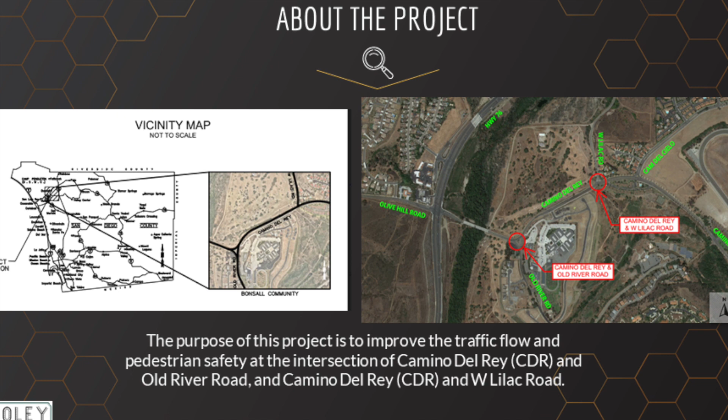Looking at the vicinity map, we can see that Bonsall's neighbors are Fallbrook, Oceanside, Valley Center, and Vista. Bonsall has a population of approximately 12,500 people. The community values its rural identity and preservation of open land.

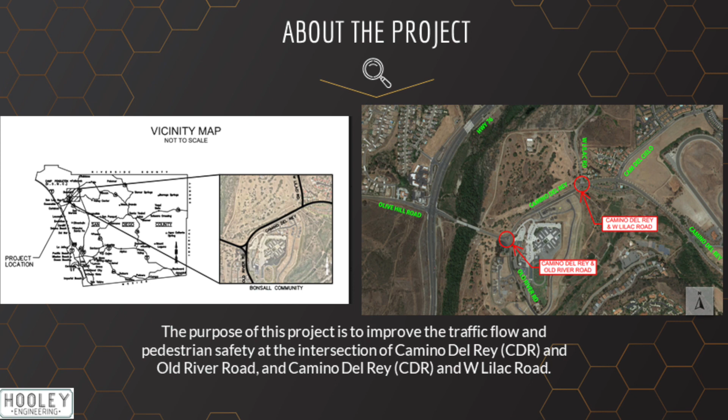The purpose of this project is to improve the traffic flow and pedestrian safety at the intersection of Camino del Rey and Old River Road and Camino del Rey and West Lilac Road, as shown in the figure to the right. The next few slides will go more into depth about the existing conditions at both intersections.

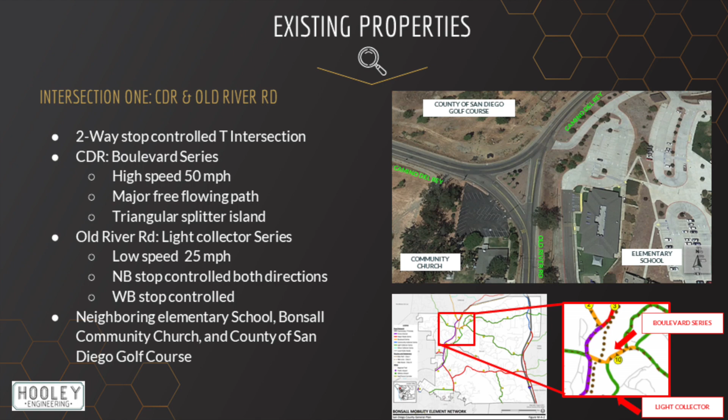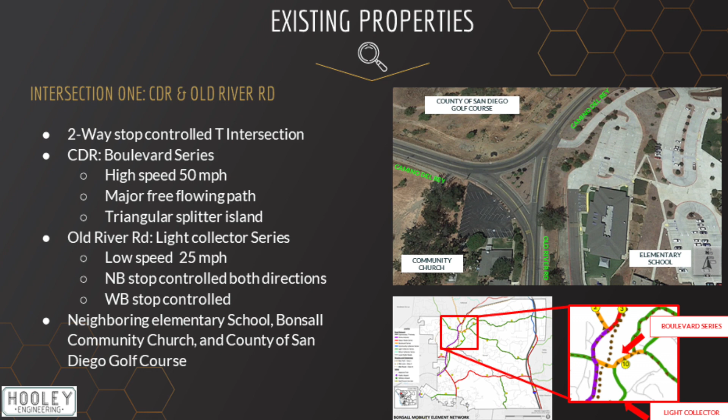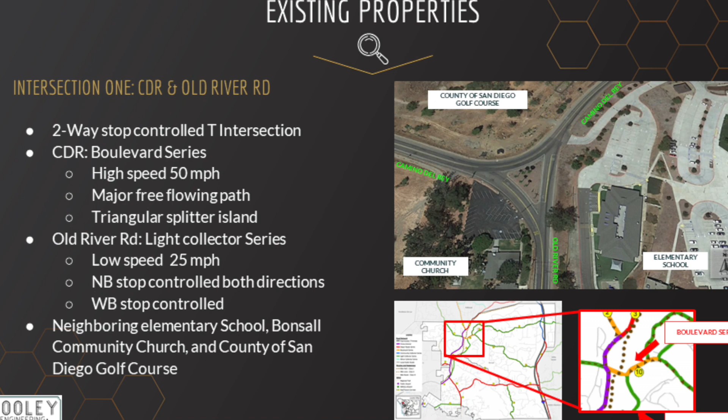At the intersection of Camino del Rey and Old River Road is an existing 2-way stop control T intersection. Camino del Rey is currently classified as a boulevard series and is a major free-flowing path with a speed limit of 50 miles per hour. Old River Road is currently classified as a light collector series with a speed limit of 25 miles per hour. It connects to the residential areas down south of the road.

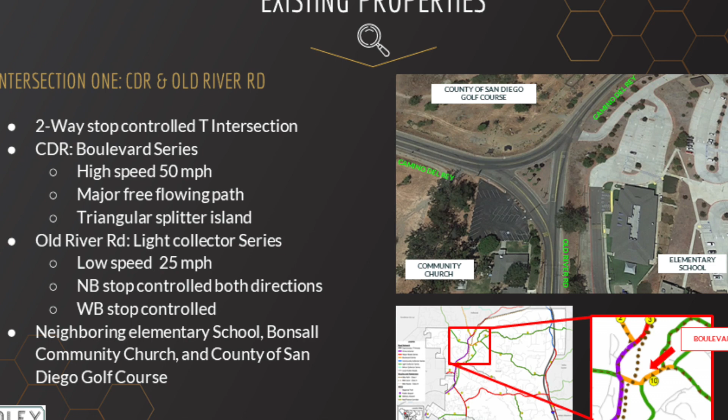This intersection is neighbored by County of San Diego's golf course to the north, Bonsall Community Church to the west, and Bonsall Elementary School to the east. The high speed limit on Camino del Rey makes it very dangerous for the neighboring community church and elementary school.

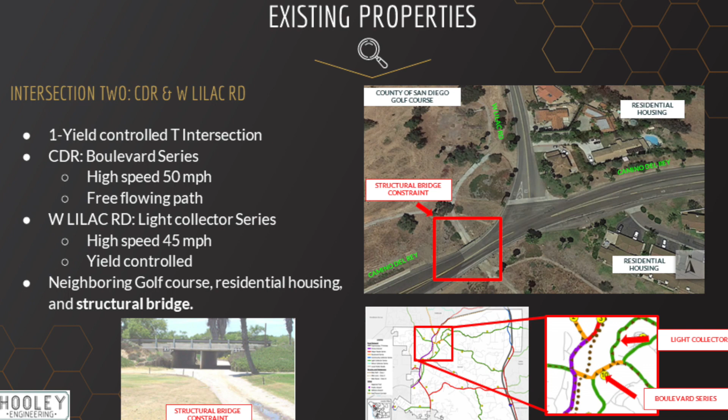At the intersection of Camino del Rey and West Lilac Road is an existing 1-way yield control T intersection. Camino del Rey has the same characteristics mentioned before, and West Lilac Road is classified as a light collector series, with a speed limit of 45 miles per hour. It connects to the residential areas up north of the road. This intersection is neighbored by the County of San Diego golf course and the residential areas.

There is a structural bridge located as shown in the picture. Hooley Engineering has made an executive decision to keep the bridge as it is, avoiding higher costs to the project.

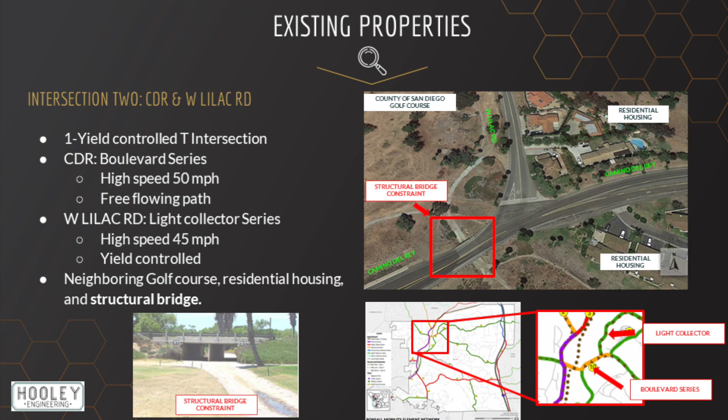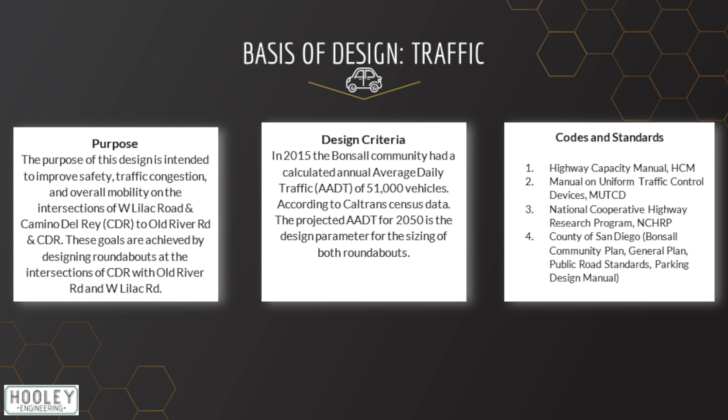In the process of our proposal, our most important focus was our traffic analysis. We had to consider many factors in our design and utilized various standards to approach this project. The primary purpose of our recommendation, the roundabouts on Camino del Rey at the intersections of Old River Road and West Lilac Road, is to provide safe routes for vehicles and pedestrians.

Our design criteria took into consideration the projected annual average daily traffic in 2050. The 2016 HCM and NCHRP were utilized in calculating the level of services and the basis of design, while the MUTCD and the County of San Diego documents also facilitated design standards.

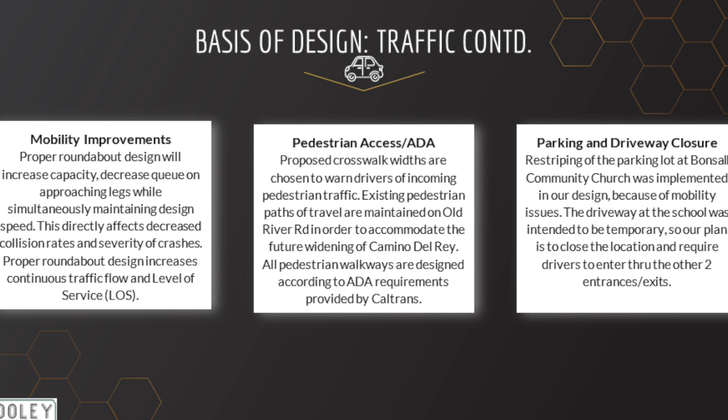As a result of our design, we were able to provide mobility improvements, pedestrian access, and appropriate consideration for outside parameters. The roundabouts would be able to provide an increase in overall safety through its reduction of speeds. The existing pedestrian paths will be maintained to accommodate for the future widening of Camino del Rey.

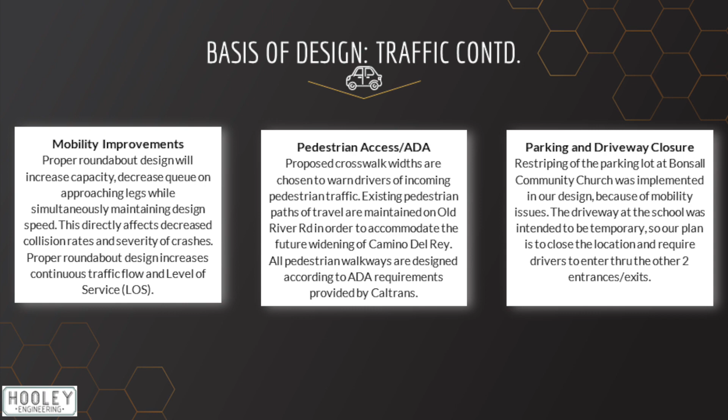For the roundabout to be most effective, Hooley Engineering proposed the restriping of the adjacent Bonsall Community Church parking lot on Old River Road. The elementary school driveway proved to be the leading cause for queuing during peak hours, and as such, it is recommended to be closed to reduce congestion.

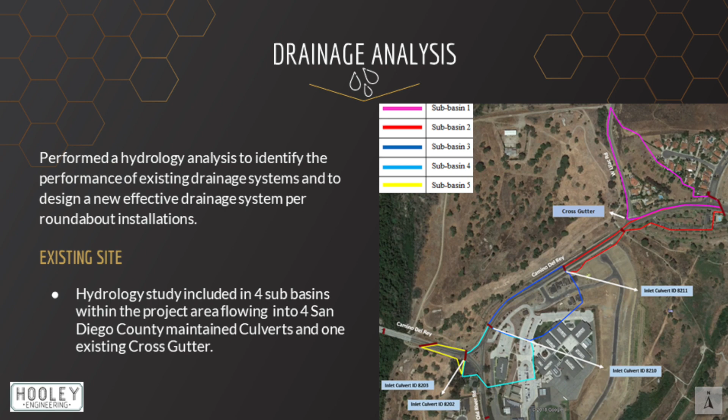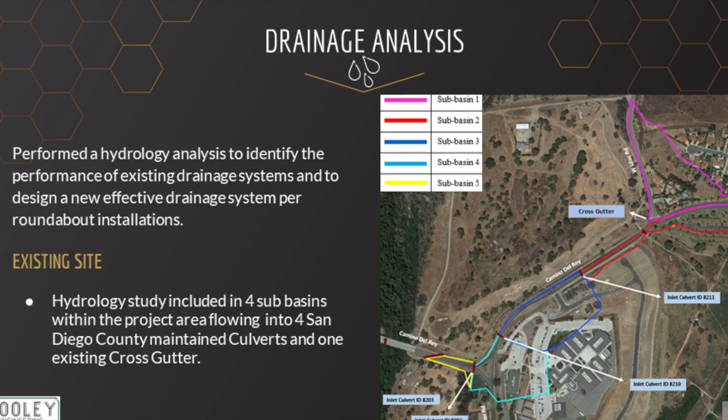A hydrology analysis of natural runoff was performed to identify the performance of existing drainage systems within this project area, as well as to design a new effective drainage system for our proposed street improvements. The hydrology study covers 4 sub-basins within the project area that flow into 4 culverts maintained by the County of San Diego and 1 existing cross-gutter.

This next slide shows each sub-basin's existing peak runoff rate at 50 and 100-year return. Please note that the rational method was used to calculate this table.

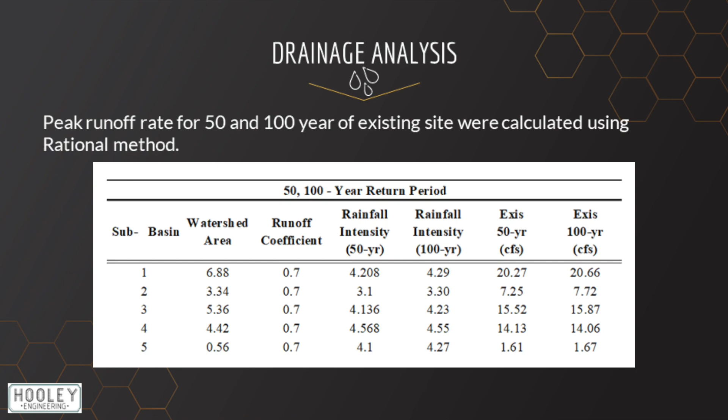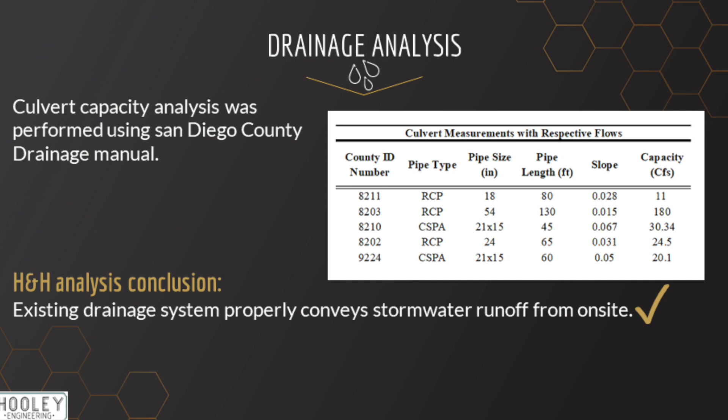The latest inspection sheets containing pipe characteristics were gathered from the County of San Diego, and culvert capacity analysis was performed using the San Diego County Drainage Manual. According to the hydrology and hydraulic analysis, existing drainage systems properly conveyed stormwater runoff from on-site.

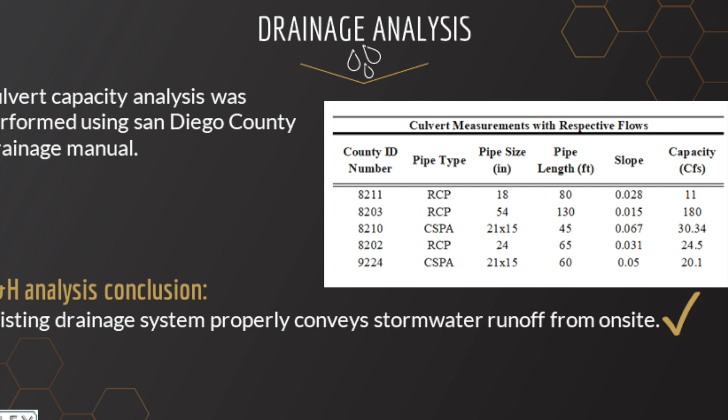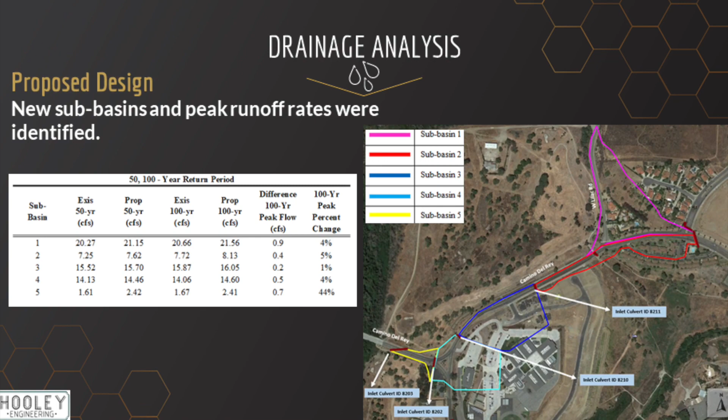After finalizing the design and the road right-of-way boundaries, the new sub-basins and the peak runoff rates were identified. The result of calculation concluded minor impacts on natural runoff.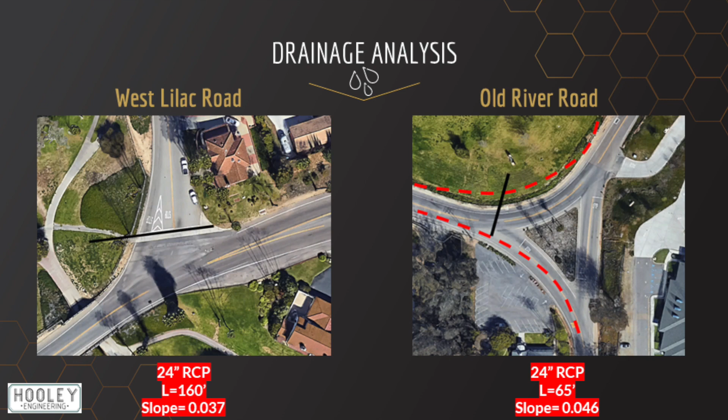With the purpose of improving the drainage and avoiding a cross-gutter running through a major street, a new 24-inch RCP pipe with type B1 inlet and wing wall outlet is designed and will replace the existing cross-gutter at the intersection of West Lilac Road and Camino del Rey.

The change of road right-of-way at Camino del Rey and Old River intersection requires a relocation for the existing pipe. According to the new sub-basins, a new 24-inch RCP pipe along with Type B inlet and wing wall outlet is designed for this location.

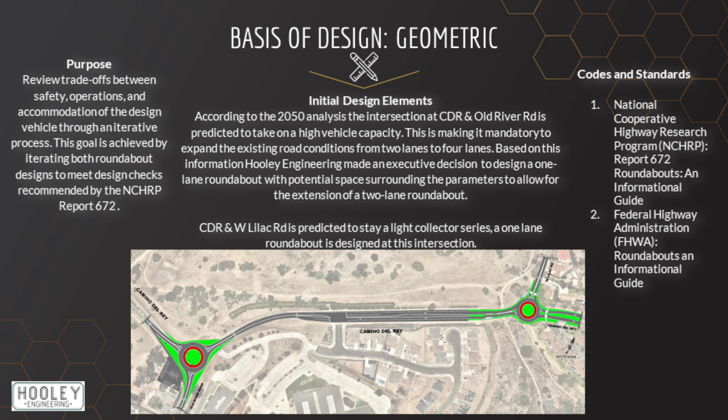For the purpose of stormwater treatment, catch basin inlet filters are installed at all the existing and proposed inlets within this project area as an economical solution to meet local and state water quality requirements and regulations. For our basis of design, the purpose is intended to review trade-offs between safety, operations, and accommodation of the design vehicle through an iterative process.

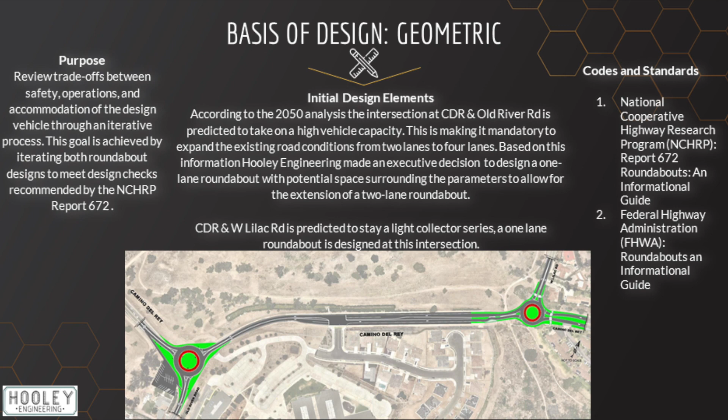Our initial design elements for Camino del Rey and Old River Road was dictated by the 2050 analysis. This intersection is predicted to take on a high vehicle capacity and must be expanded from 2 lanes to 4 lanes. In 2050, when a 2-lane roundabout needs to be implemented to accommodate higher vehicle capacity, the footprint of the existing roundabout will be adequate for the expansion.

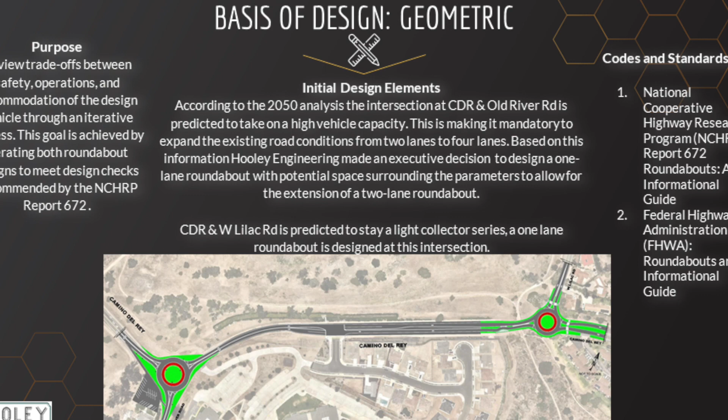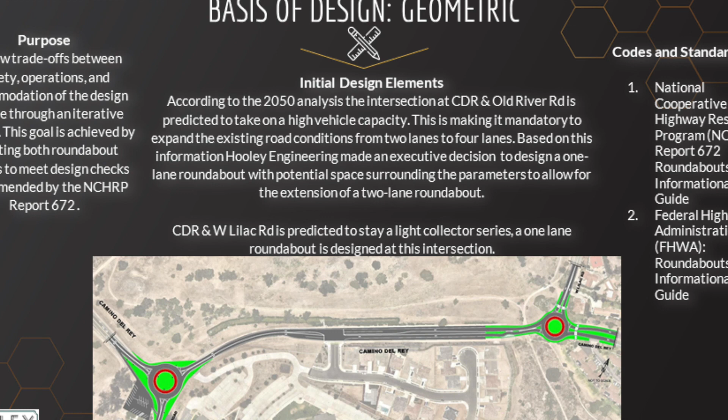Camino del Rey and West Lilac Road is predicted to stay a light collector street. A 1-lane roundabout is designed at this intersection. Most importantly, the codes and standards used to iterate the design of the roundabouts are the National Cooperative Highway Research Program Report 672, and the Federal Highway Administration Roundabouts Informational Guide.

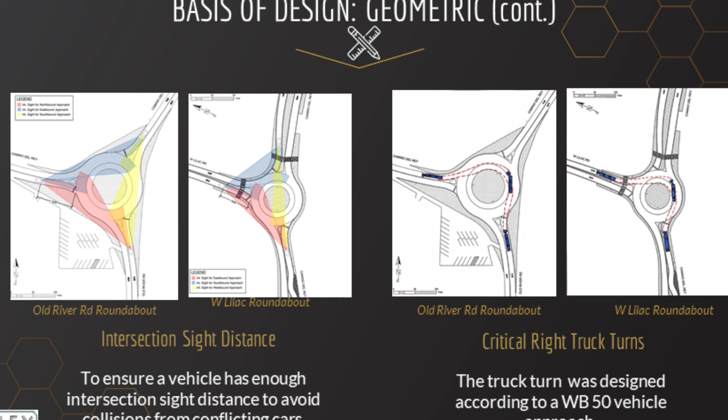The following slides will explain the design checks that were performed on the roundabouts. A critical component of our design was determining the intersection sight distance, which is the longest length that a motorist can see approaching vehicles before their line of sight is blocked.

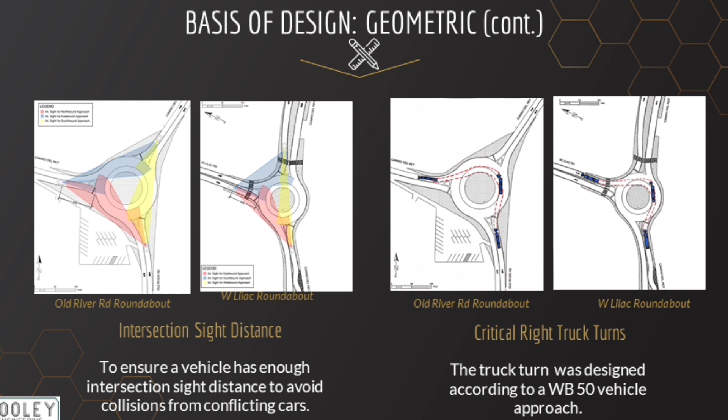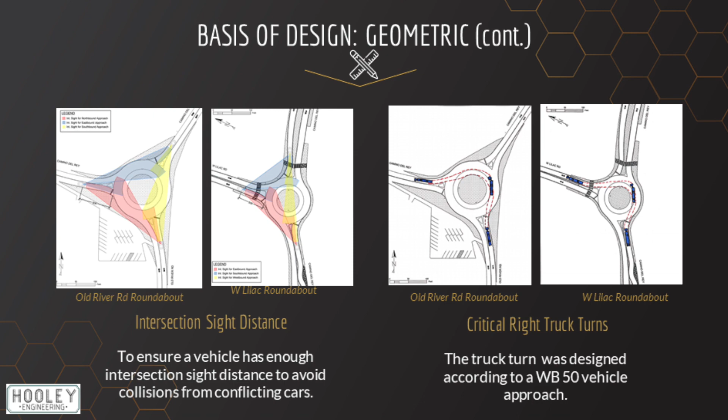According to Exhibit 6-58 of the NCHRP, a roundabout with a circulatory design speed of 25 miles per hour must have an intersection sight distance of 184 feet. Both of the roundabouts were checked for this requirement and are represented in this slide.

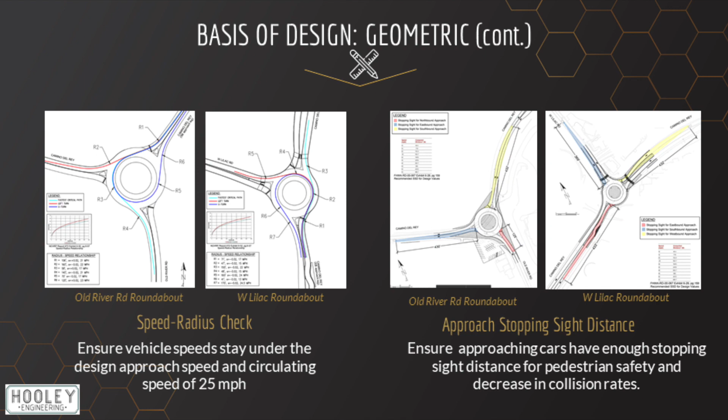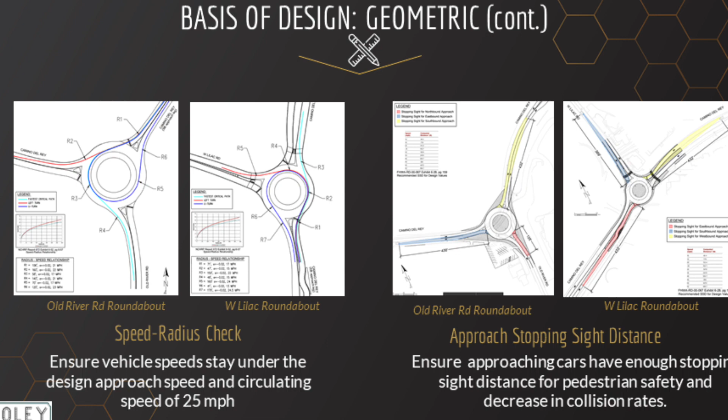Another design consideration we needed to account for was the design vehicles that may use the roundabout. Both roundabouts were designed to accommodate a WB-50 truck and emergency vehicles. The truck apron allows bigger-sized vehicles to make a successful U-turn, and the choice of a rolled curb for the center island and splitter ends allows emergency vehicles to cross the intersection.

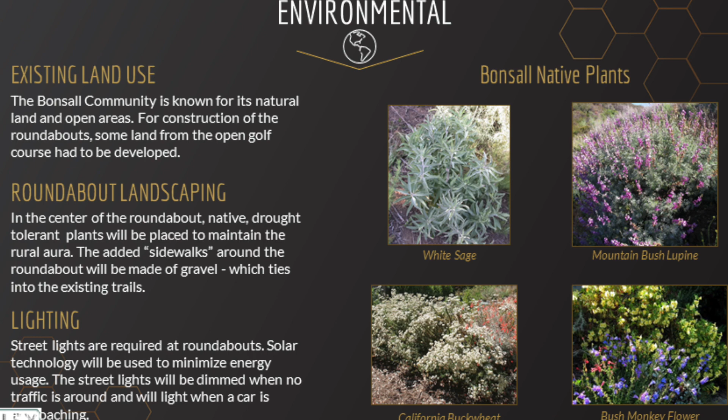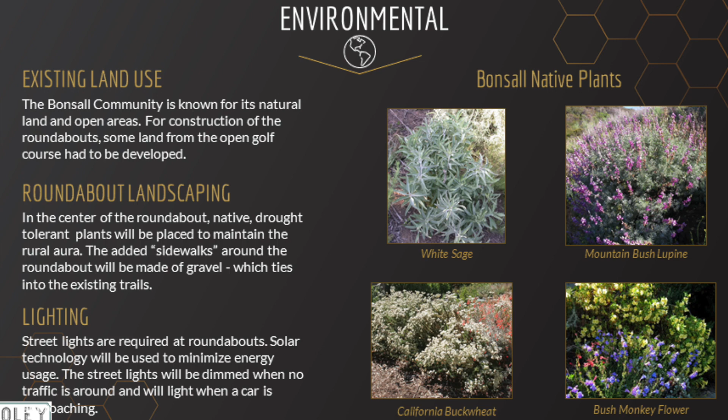We're talking about the existing land use, roundabout landscaping, and the lighting. Here it shows the Bonsall native plants, which are white sage, mountain bush, lupine, California buckwheat, and bush monkey flower in Bonsall. The existing land use is that the Bonsall community is known for its natural land and open areas. For construction of the roundabouts, some land from the open golf course had to be developed.

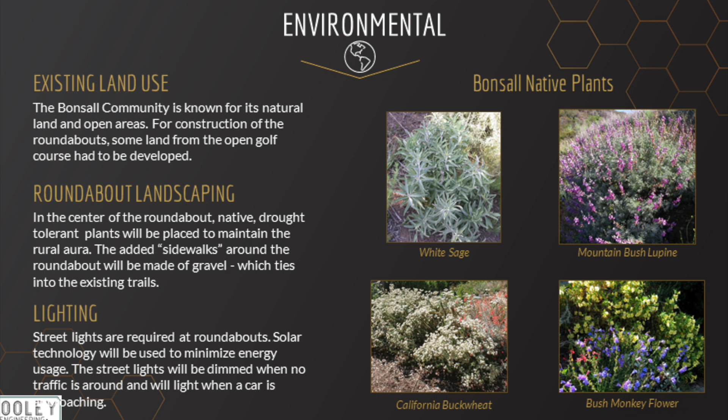The lighting that we used for the roundabout, solar technology will be used to minimize energy usage. The street lights will be dimmed when no traffic is around and will light when a car is approaching.

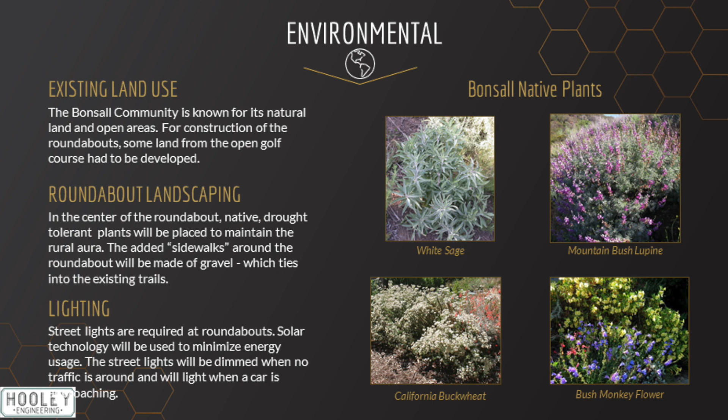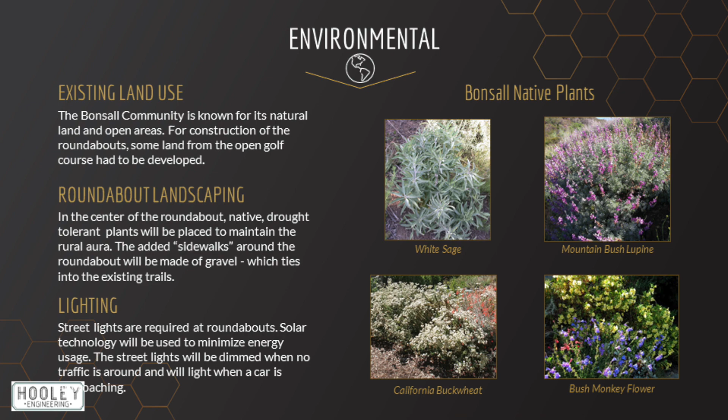For the plants that are surrounded or on the roundabout, the landscaping is in the center of the roundabout. Native drought-tolerant plants will be placed to maintain the rural aura. The added sidewalks around the roundabout will be made of gravel, tying into the existing trails.

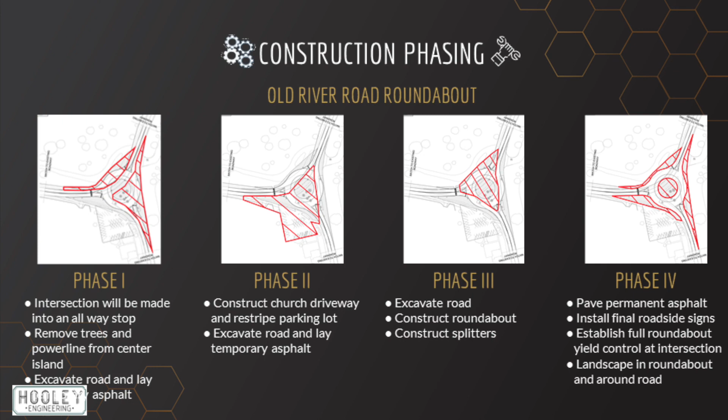During the construction of Old River Road Roundabout, the intersection of the three approaches turned into an all-way stop. No road could be closed due to the high volume of through vehicles to the surrounding neighborhoods and State Route 76. The roundabout is constructed in the third phase, and then the road is repaved in the fourth phase.

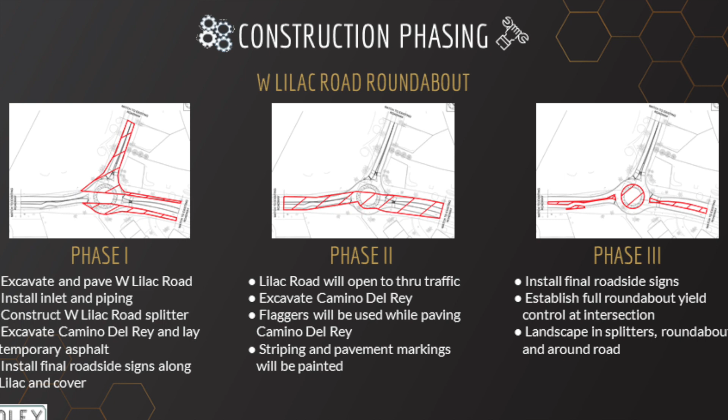During Phase 1 of construction, Camino del Rey will stay open to through traffic. West Lilac Road will be closed to through traffic and will be excavated, and a new pipe and inlet will be laid parallel to Camino del Rey.

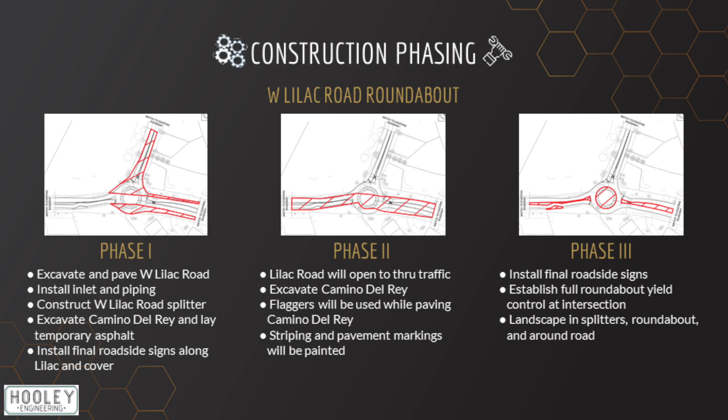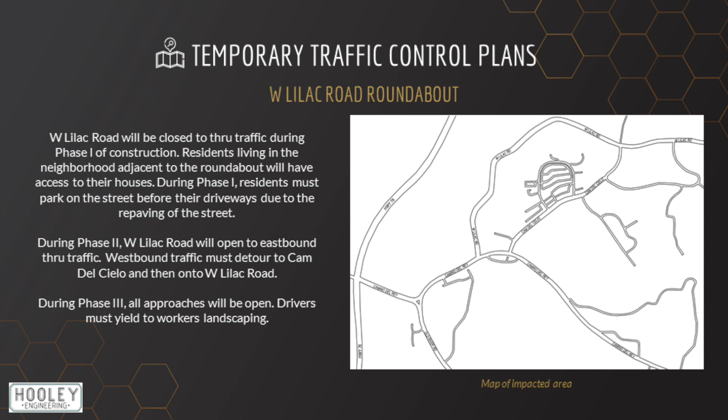Phase 2 will require flaggers while laying the permanent pavement on Camino del Rey. During Phase 1, West Lilac Road will be closed to through traffic, and traffic will be detoured starting at the intersection of Cam del Cielo.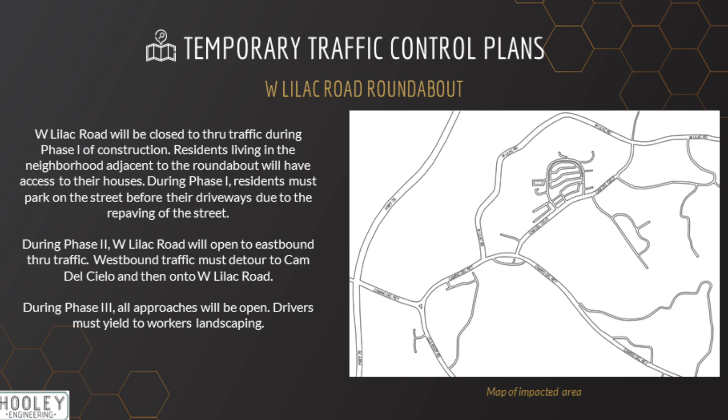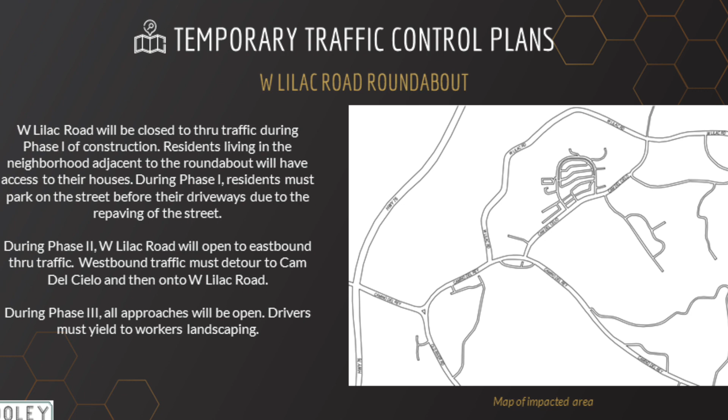Westbound traffic will detour south on Cam del Cielo and then west onto Camino del Rey. Eastbound traffic will detour north onto Cam del Cielo and then west onto Lilac Road. During Phase 2, West Lilac Road will open to eastbound through traffic, while westbound traffic must detour to north Cam del Cielo and then east onto West Lilac Road.

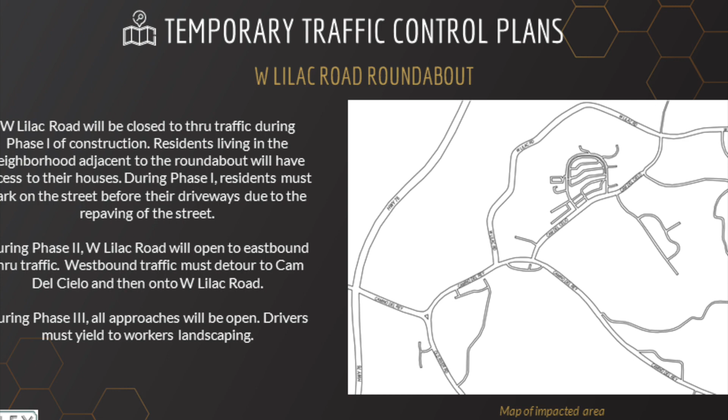During Phase 3, all approaches will be open. Drivers must yield to workers landscaping at and around the roundabout. Thank you for watching our presentation.